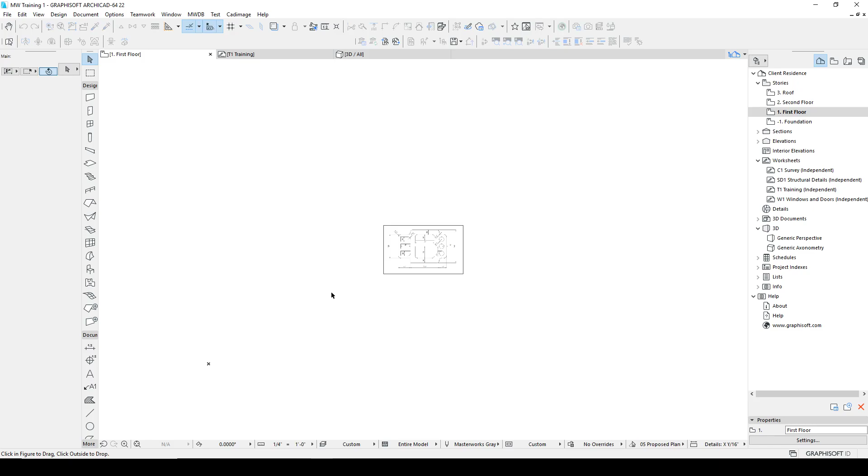I used the snip tool in Windows—I select the region, it puts it on the clipboard, and I just paste it into ArchiCAD. Now this is coming in at whatever scale it's coming in; I don't really know what it is. There's a unitless figure, so we're going to just assume feet to make it easy.

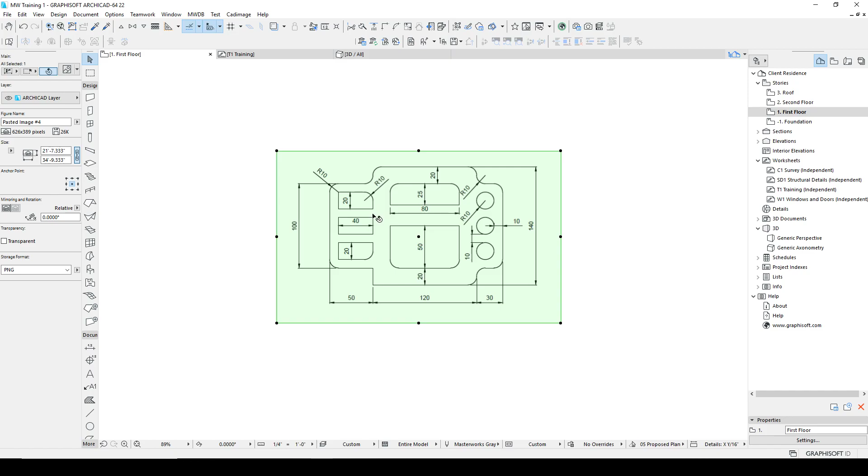So I'll go ahead and expand it so that it's close to full scale, just visually scaling it up. The shortcut is Control K. We want to define it graphically, so we'll hit OK.

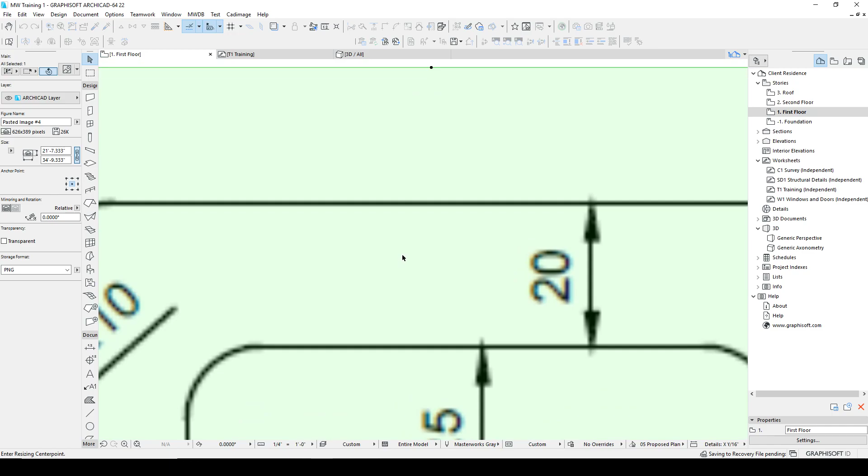What you can do is zoom in here. Make sure you're zooming by moving the screen towards you, not your head towards the screen—move your work towards you. That's why we use CAD. So I'm rolling in and out with the wheel. When I hold the wheel and drag, that pans around, and wherever my cursor is, that's where it's going to zoom in. So move to the point where you want to zoom into and roll your wheel.

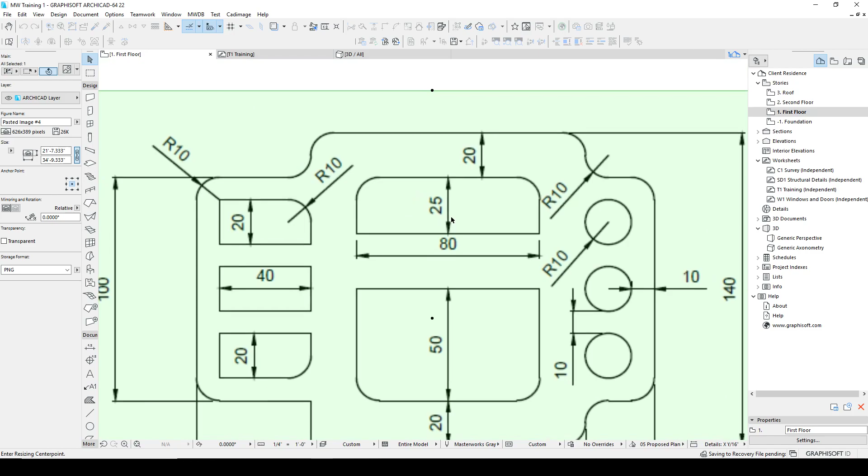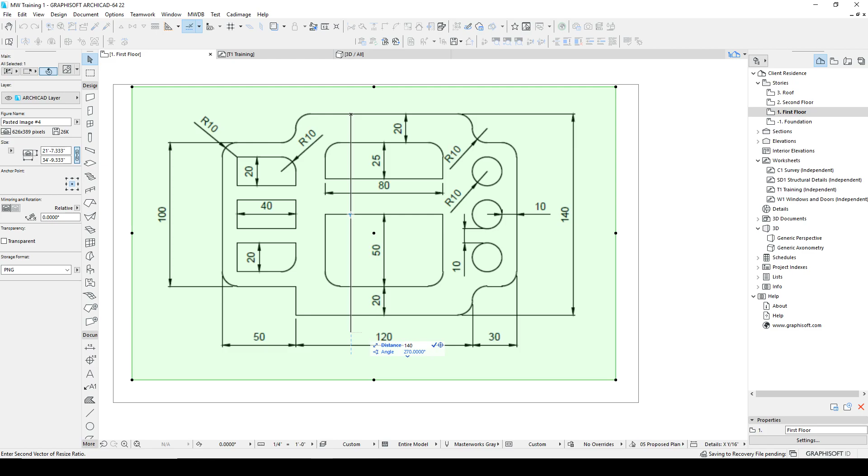Work big, keep it simple. I'm going here, holding shift, zooming in, going roughly to the center of that line. This is a bitmap image, a raster file, not a vector file, so it's not snappable. But after I do that, I can type in the value—in this case it's 140 feet, which is the assumption—and I'll click. Now it looks the same, but it's bigger.

If I zoom in and hit M for measure, get in here, you'll see that, within a reasonable amount of visual tolerance, I'm roughly the right size. This can be a good way to work when you're trying to duplicate a molding or something else.

Often I'll take a piece of molding and drop it on top of my scanner, make a scan, bring it into the computer, measure one key dimension and hold that dimension exactly, then get the contour of the molding or the tile or whatever it happens to be—a nice approximation of it. We'll work on that in another video.

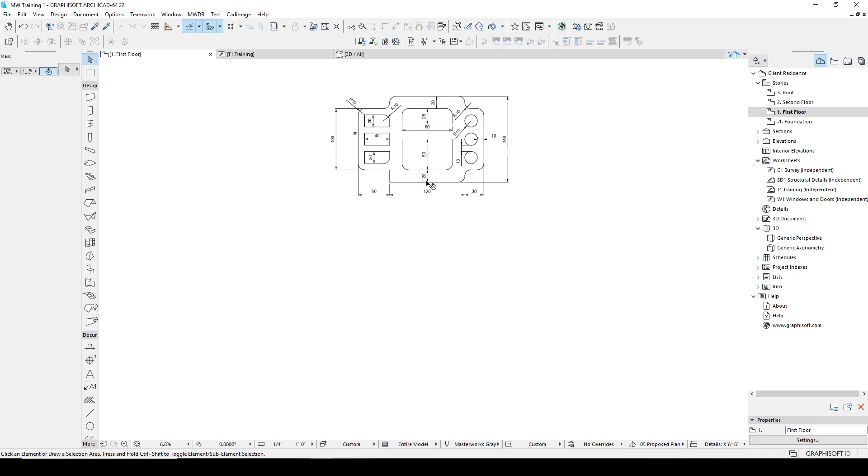So this is basically the same size. The strategy I'm going to take with this is to ignore all these fillets at first—I'm just going to do square corners. We'll come back and fillet it later.

We can just kind of march around, and that's the easiest thing to do. We'll start down at this corner. I'm going to click L for line.

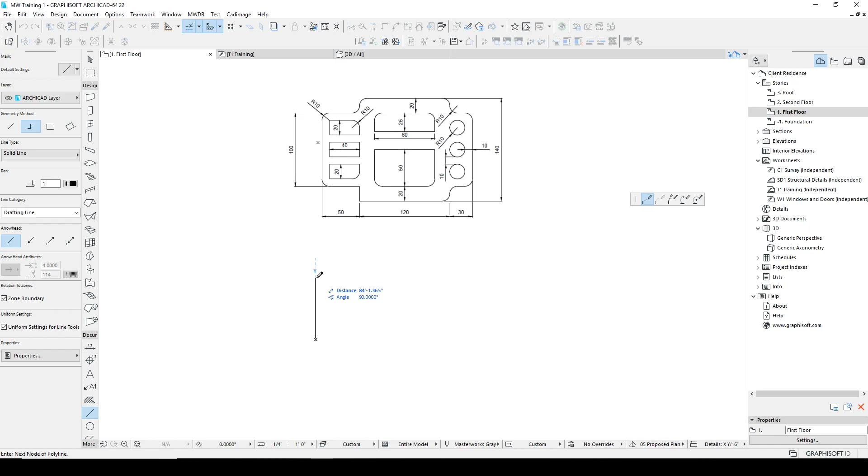I'm going to go up, and I'm snapping to my y-axis because I have my snap guides enabled, so I don't have to hold shift. I can just type 100, and then I move along. I type 50 - that's this dimension here. I go up 20, I go over 120.

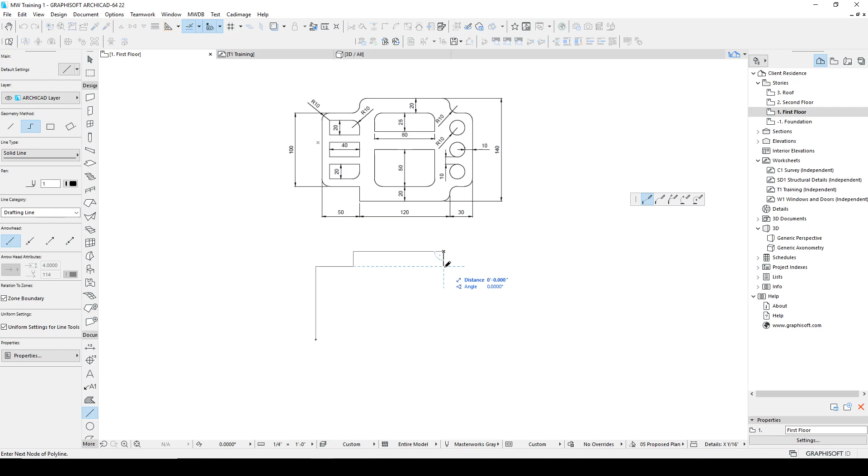I go down to this corner, which is aligned here. I go over 30, I go down 100 again. Come over 30 - notice these guidelines are pretty helpful, it's giving me a lot of good feedback.

20. Now I'm going to hold shift just to show you the difference. So now I'm holding shift - not working, there it is. And I click up, I can hold shift, click, and click. And I've closed this figure.

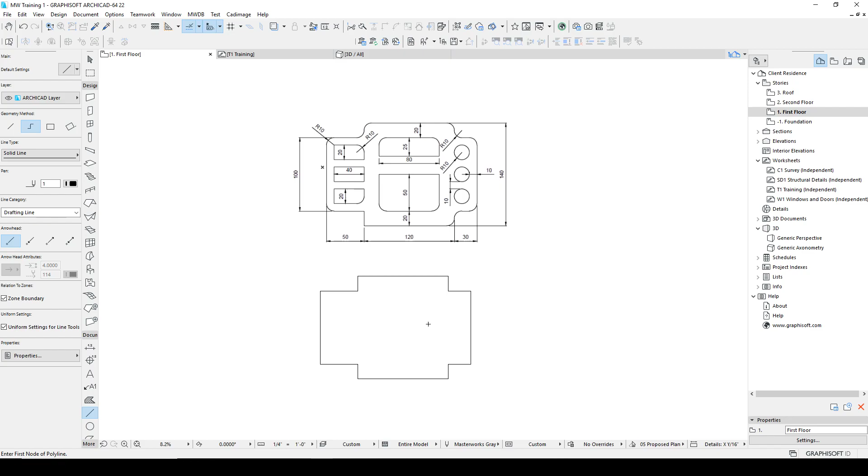I've got this shape down, so I've got the overall shape complete. I'm not going to do my fillets yet because I'm going to use these as reference. I can kind of infer that this is 10, in our case, feet.

So I'm going to shift - I'm holding shift, selecting the line, hitting F9 to copy, moving on the far side into the direction I want to move it. I type 10, enter.

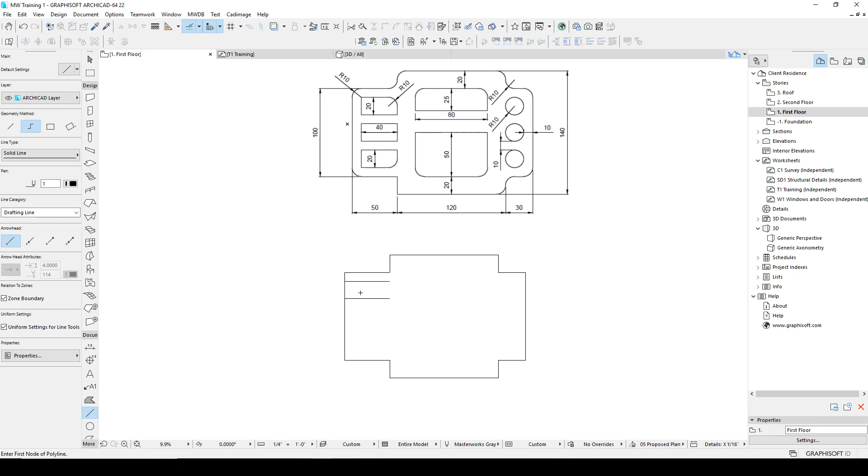And now I'll go ahead and just do that again. Come down, I'll go 20. And that gives me these two lines. I'll copy this one, F9, come over 10.

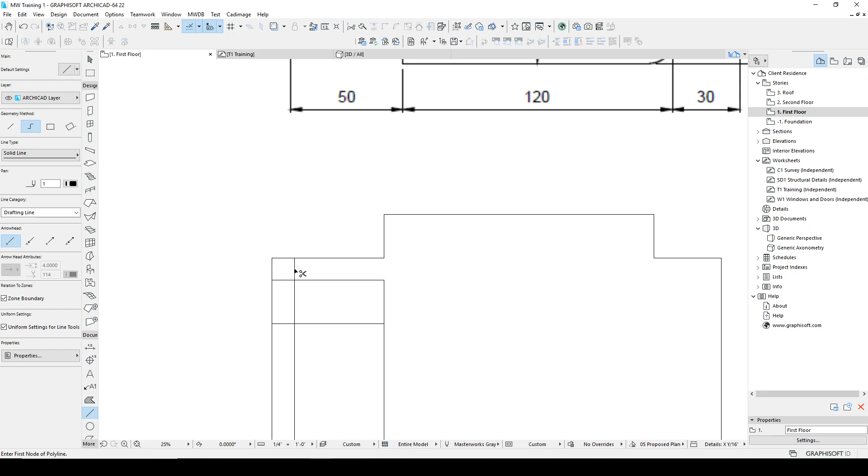And I have a couple of options available to me now. I can see that it's 40 wide. I'll just go ahead and finish this off at 40. These align. I can use the control key, so I'm holding control and I'm just going to clip these out. That's just a nice, clean, easy to understand process.

Now I can take this entire thing. I held shift to get my arrow, I box selected. And now I want to move these down. The assumption is that these are 10 units, so I need to go down 30. So I'll do F5.

Control Alt - Control Alt gives me this multiple copy. I can come down 30, and then I can come down 60. And now I've got all three of these boxes ready to go.

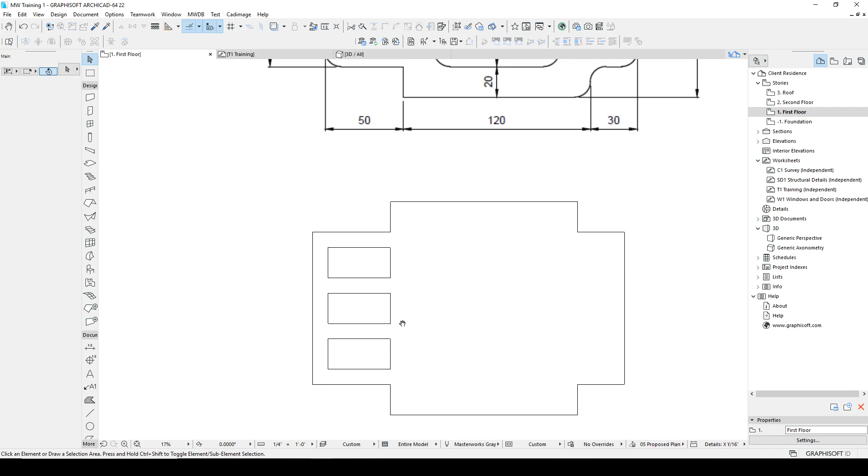And I'll just do the fillets afterwards - they're all the same size fillets. And come back and do some measuring just to make sure, yep, everything looks nice. That's 20, that's 30. I kind of use my downtime when I'm thinking, I just go around and measure and make sure I didn't make any mistakes.

Now this is 80 units and it's centered along this guy, and it's 20 down. So I'll do an F9, come down 20, F9 again, come down 25.

And now I have some choices. The easiest choice would be to go ahead and - now I'm not seeing my, I'll turn on my tick marks here.

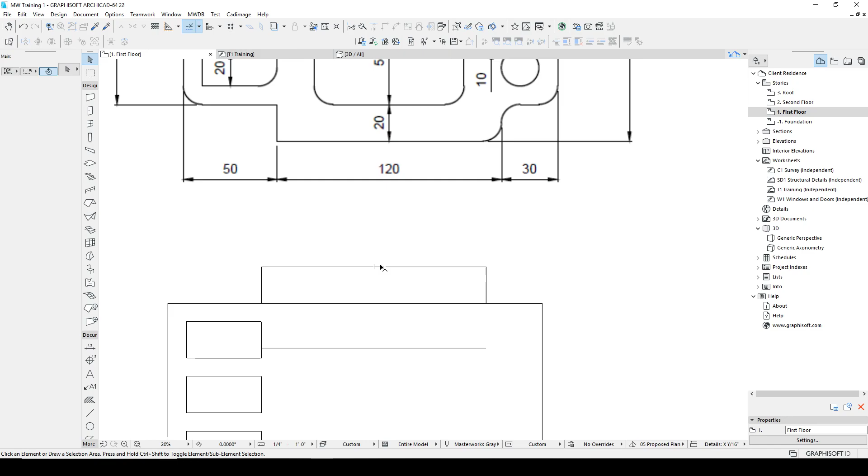And I want to be between nodes, and so now I have my halfway points being highlighted. It's between this overall line. I'm assuming that this shape is centered within this shape.

And I can do a couple of tricks here. So I have my guidelines going, but they're not going to give me any information because I'm not on an endpoint. So the easy way is to just run a construction point.

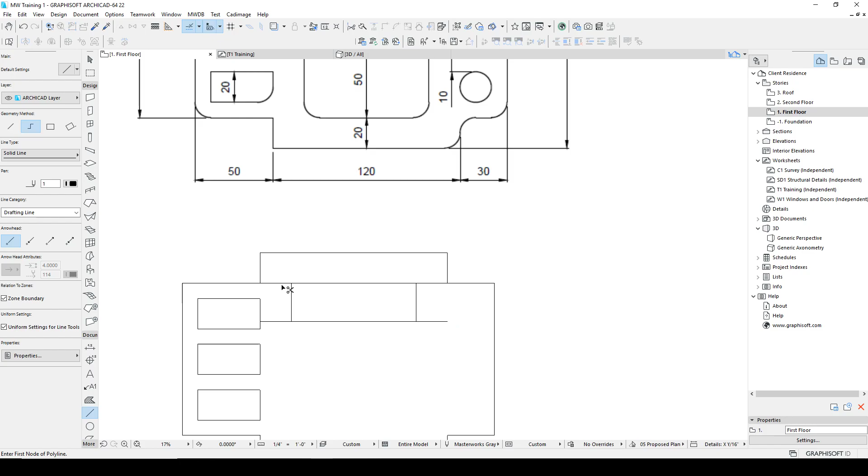I can clip this. I hold shift, select this, hit F5, and I move it 40. F9 to move it back 80. Again, that's really the most straightforward approach, and it doesn't take too much mental processing to get that to work.

I can take this, copy this, F9, bring this down. Now I'm going to show you, I'm going to do this a couple times using a couple different techniques. The first one is just I move it, and then I hit F5 again for my move, click, and I come up here 20, and there's my box, 20 from the bottom, but I need to be 50.

This one was 25. So I can box select this and use my pet palette to extend this. I can go up 25. And now I have a box that's 20 from the bottom, and 50 here.

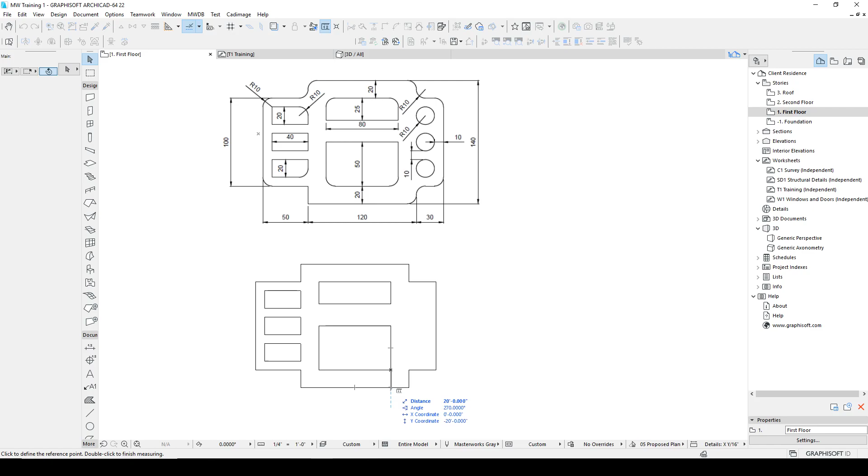Now let's try that another approach. So another way to do this would be to do an F5, move this down, and instead of copying it to this location and then moving it, I can use the user origin.

So I hit Shift Alt, and I did that kind of at a nice quick press of pressing both at the same time and kind of fast - it's a little tricky sometimes, it doesn't want to stick. And then I can type 20, and that took out one whole step. I didn't have to copy it and then move it. I was able to copy it, use this as a reference, and move it back up, and then I can use the same strategy here to bring this up 25.

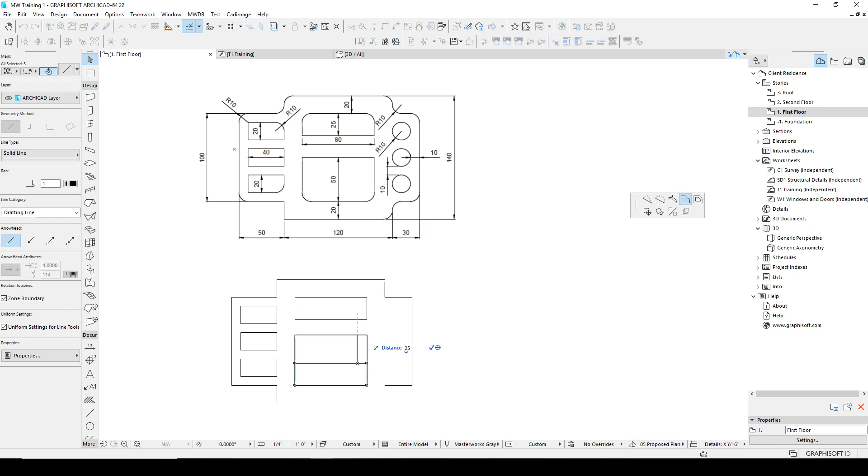Notice that it's repeating the same command on the pet palette. So now I can just type 25, and that's really fast. The other thing I can do, and I want to use as many tricks as I can.

Here I'm going to draw a circle. I'll select it with Shift and hit F5, Control Alt gives me my multiple copy. Now I'm going to select those there. And now I have 3 circles.

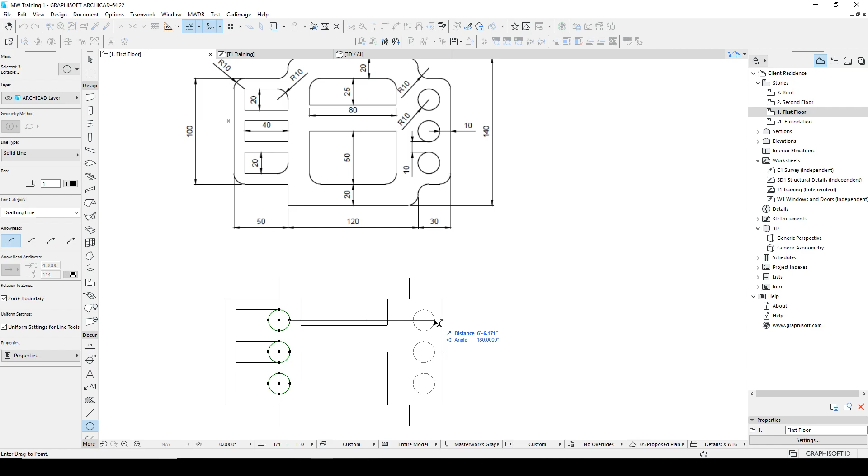Now I'm going to move them with F5, and I'll use my trick. I used Shift Alt so that I moved my user origin, and I can type 10 in that direction. Now I have my circles because I know all these circles were aligned with the squares.

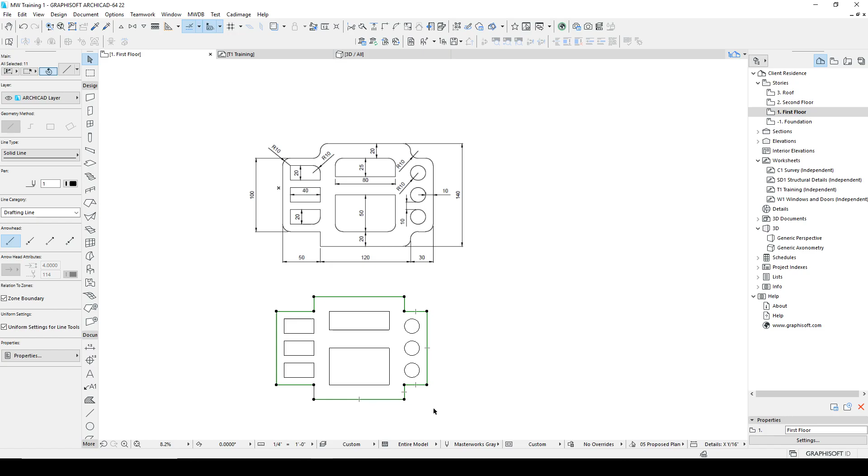Now I just have to go through and do some quick fillets. If I select all of these lines and hit fillet, I want a fillet of 10. It did all of them at once for me.

Missed one, so I'll come here, holding Shift and selecting both of those, hit fillet. I can just enter, it remembers the radius. And I think I have a couple more.

I'm holding Shift, selecting from right to left. Again, make sure that you have this directional dependent selection going for you.

I'm going to select these two. Oops, so I didn't want to select those. I'll reselect them to deselect. And let's see if it'll do all these fillets at once.

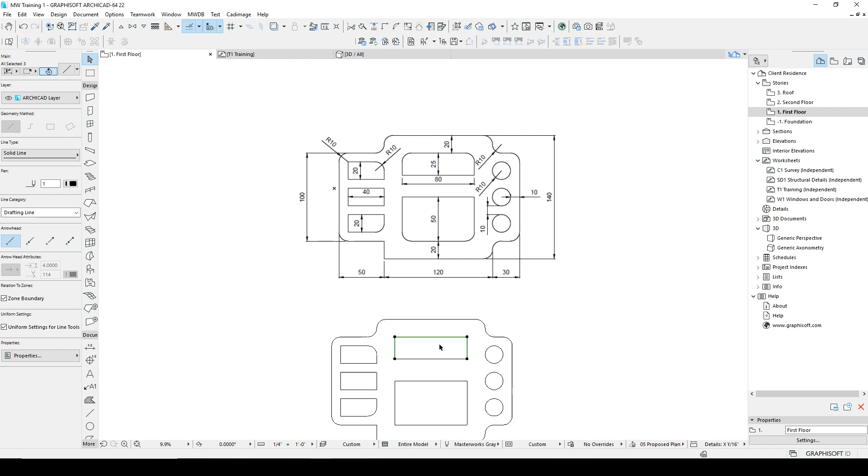It didn't, it got all confused. So I undid that, and we're going to have to do this one at a time. Otherwise it's trying to blend too many. I can do 2 fillets at a time here, no problem. F for fillet, so I'm using my keyboard shortcuts as much as possible, clicking fillet, and OK.

And now this figure is completely drawn. So that's kind of a quick and easy way of getting this shape to work for you.

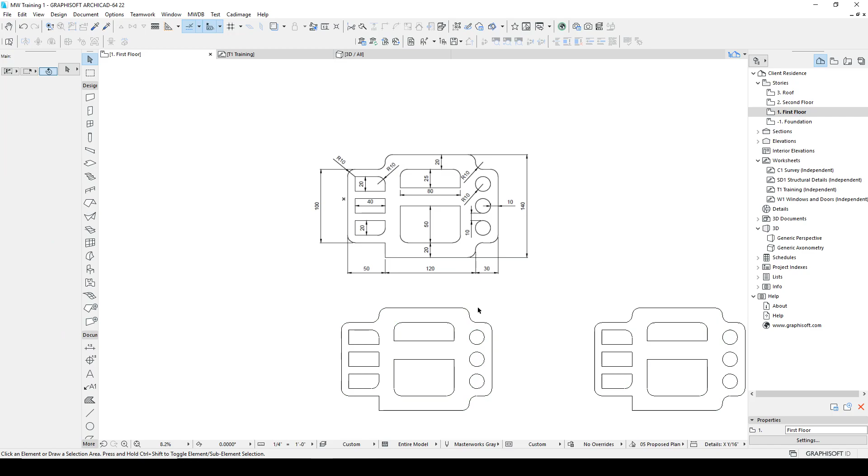And I'm going to take this whole thing and move it away, out of the way. I'm just going to do it again. Oops, I copied it, I didn't really want to copy. Let me delete that. I'm going to do it again and see if my brain finds a different approach.

Okay, I typed in the wrong number, I accidentally typed 10. One thing I want to show you is to hit backspace, you don't have to clear out of the command. Just hit backspace, type 100. I'm going to just march around again.

I think that there are other ways of doing this, but I think this is the fastest and takes the least brain power.

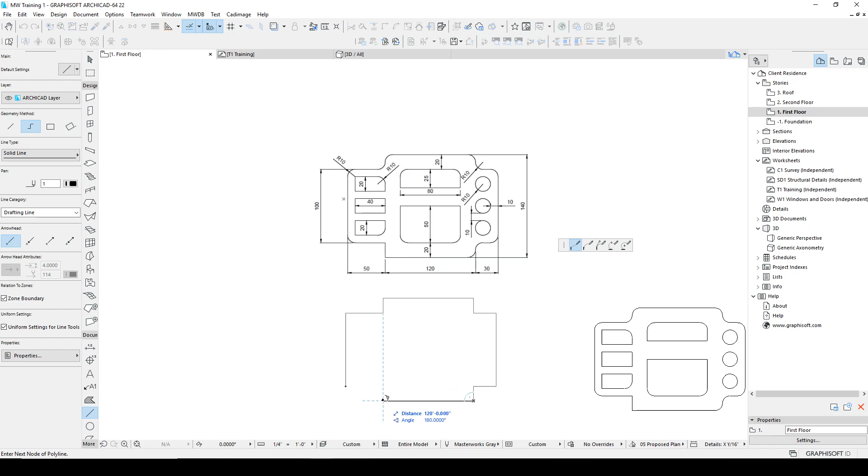I can always move this out of my way if I need to. This is 100, I'll line this up to here, come down 20, and we'll close that up.

So another way to do this, I might take this line, F5, Control Alt to get my multiple copy, and I can come over 10, and then come over 50. Then I can do the same thing, F5, Control Alt, come down 10, then come down 30.

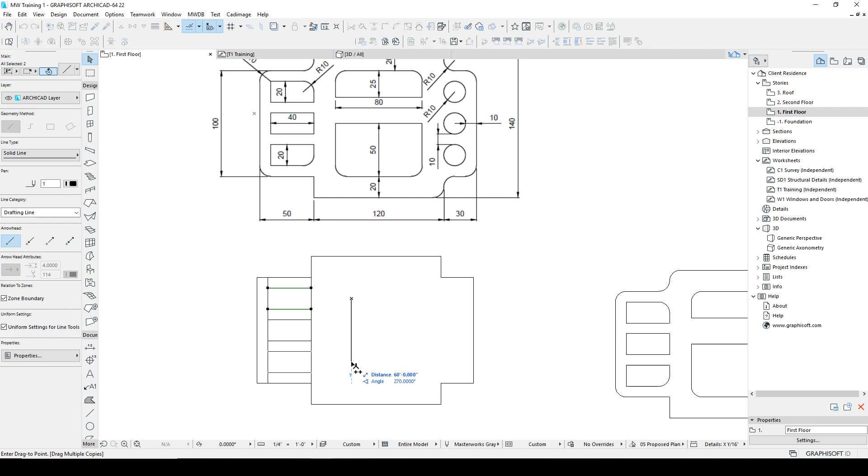And I can trim these lines, and then I can take those two using Shift to select. I'll do F5, Control Alt again, and come down 30, and come down 60. And then I can trim these out. So many ways to get to the same point, whatever works for you.

Another way of modifying these, I could actually come here, move my user origin with Shift Alt, and this is 20, because 20 plus 80 plus 20 is 120.

And then I can just stretch this, and I know these are 40, so I need to go another 40 and move this F5, moving my user origin. So moving that user origin is pretty tricky, a fun little thing to do. You're going to find that it saves you a lot of time.

This time I'm going to bring this down. How do I want to do this? I'll use this little snap tool and see if that works. So I'm snapping, it's not going to work. Okay.

So I'll bring this down, bring it up, move it 20, and bring this up 25. So kind of a similar approach. Anyways, just many ways to do it. Find the way that works. I'm sure if I did this again, I'd find a couple of different little tricks to do.

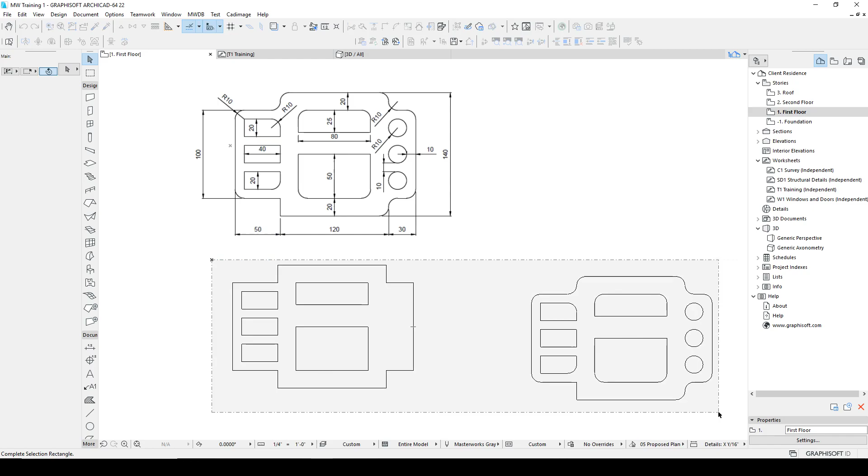And with time and practice, you will be very comfortable to look at this and then work your way right through it. So I hope you enjoyed this exercise. The next one's going to be a little bit more challenging, but similar concepts. The layout's going to be a little bit more difficult, but that's what makes it fun. We'll see you then.